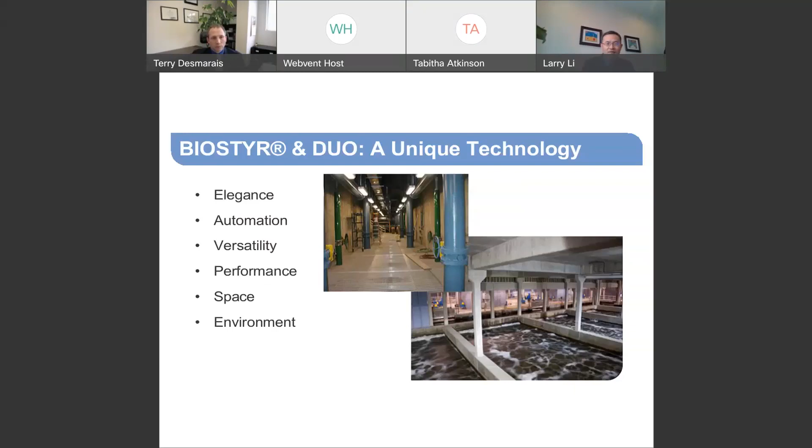And once the water is treated, it goes through the nozzle slab, and it goes up to the second layer, which is what you see here as almost like clean water coming out of a well. It looks like a swimming pool.

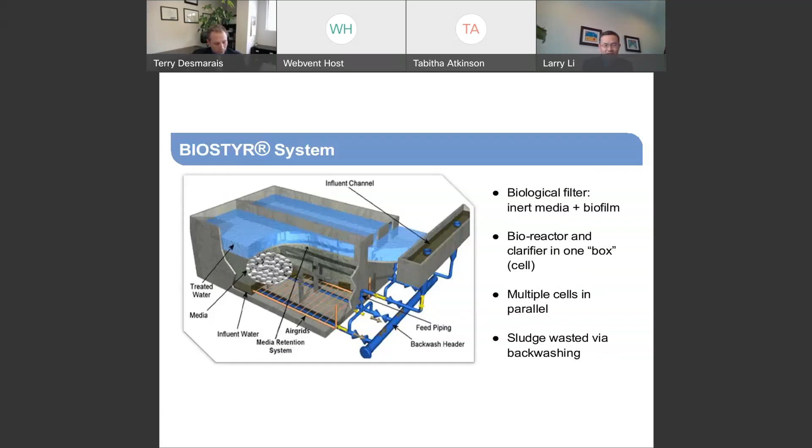Now, a little bit more details. As you can see, this is a treatment cell. On the bottom is the distribution channel, air grids. You have support columns, and you have a supporting slab. The media will be floating against the top ceiling of the treatment cell. So for the regular BIOSTYR, you have the polystyrene media on top. For the BIOSTYR Duo, you will have a layer of the K5 MBBR media. So the MBBR K5 media gives the BIOSTYR technology more treatment capacity.

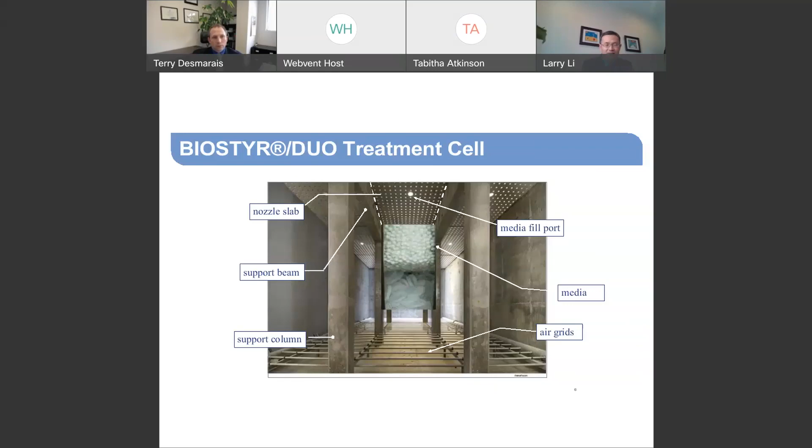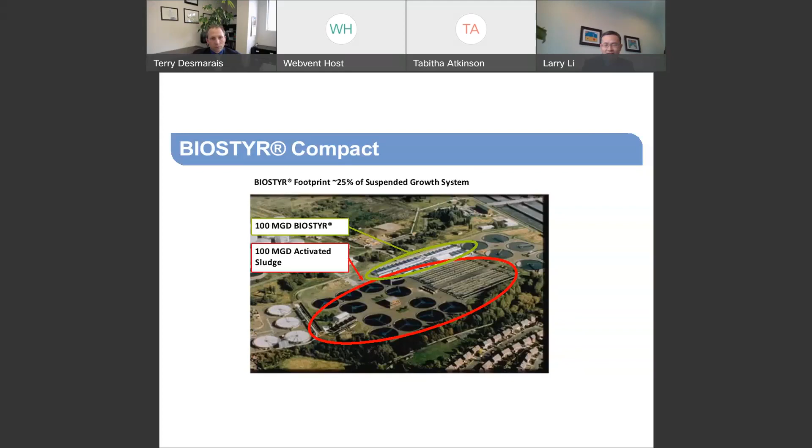This is a quick picture showing an actual plant. As you can see here, there's a 100 MGD BIOSTYR next to a 100 MGD activated sludge process. As you can see, the footprint of the two are very different. The BIOSTYR is only about 25% of the footprint of the activated sludge process. Like we were also talking about, if you are one of the guys who live right there, as you can see those houses, you would appreciate the BIOSTYR probably more than the activated sludge process.

We do have pilot capacity. So if you guys are interested in looking into the technology, we can definitely provide the pilot equipment for any study you're interested in.

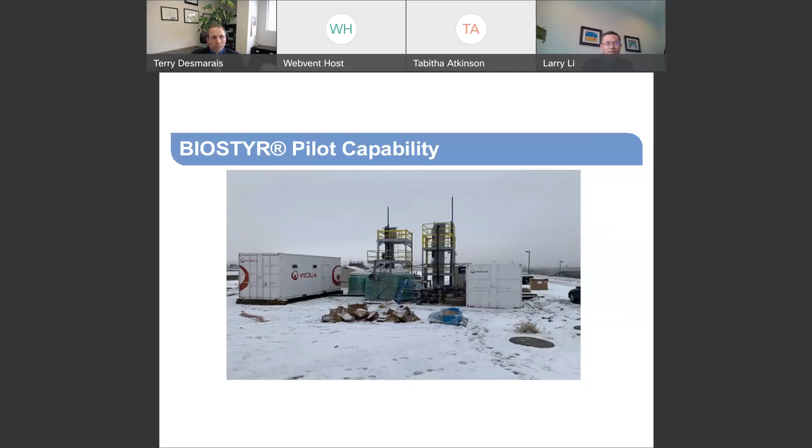I will walk through the City of Portsmouth installation project, where we just recently put in a tertiary level biological aerated filter BIOSTYR, and discuss some of the challenges that it helped us overcome. Just quickly on the City of Portsmouth, it's a seacoast New Hampshire community located on the southeast side of the state, right on the seacoast of the Atlantic Ocean, near the mouth of the Piscataqua River. We're only about 5 minutes from Maine and 20 minutes from Massachusetts. We're tucked right on the seacoast of New Hampshire.

It's a historic community settled in the 1600s, incorporated in the 1800s, and is a tourist destination for the area. We can double our population in a day just based on tourists, and also workforce influx of people. We have within the limits of the city a converted Air Force base. It's now called the Pease International Trade Port. It's a pretty major economic hub for the area as well.

As far as the city's infrastructure, we provide regional water distribution as well as regional treatment of sewage. So we treat all the wastewater from the City of Portsmouth and the International Trade Port. We have a few customers in the adjacent communities, and then there's another island to our east called New Castle, and that is treated by the City of Portsmouth's wastewater treatment system as well.

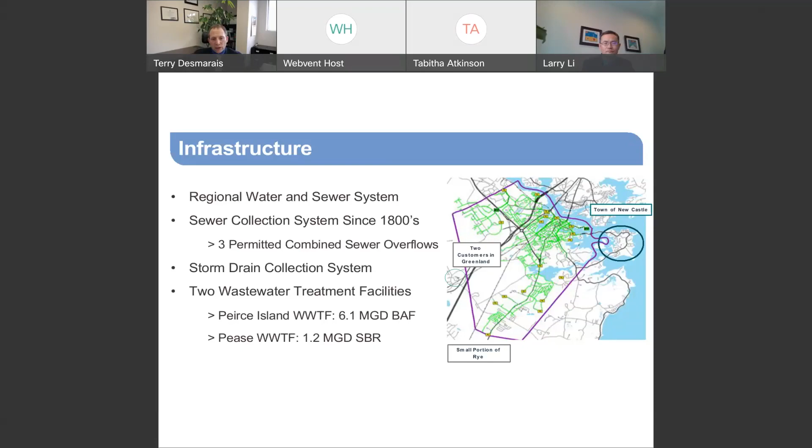The City of Portsmouth sits within an estuary, the Great Bay Estuary. It's in the National Estuary Program, and like many of the estuaries in the country, the dialogue about eutrophication concerns and potential for nitrogen permitting has been going on for well over a decade here. The thing that's interesting, as it relates to the importance of this project, was that we were in the planning phase and the design phase without a permit in place for nitrogen. So it wasn't until later on that the permit came into play as a final permit.

So there were a lot of decisions that had to be made up front on the level of treatment, and you'll see what we elected later on in the presentation. But this is a major estuary. It has 52 communities in both New Hampshire and Maine, and within that area, there are 17 wastewater treatment facilities.

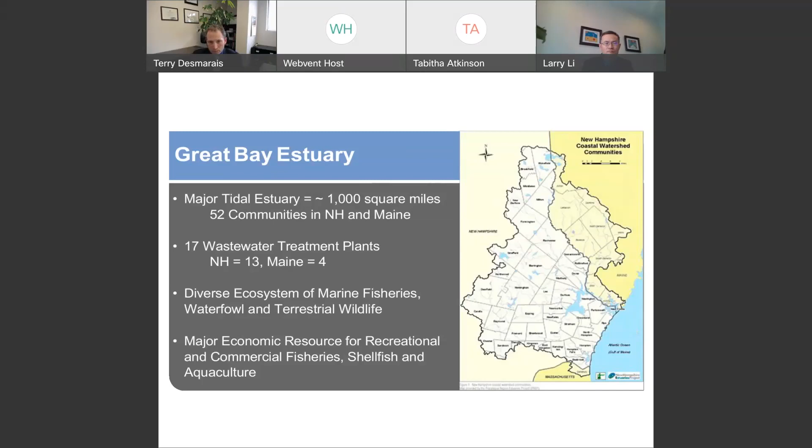So as it relates to the particular treatment facility, the Peirce Island wastewater treatment plant, the treatment facility was constructed in the 1960s, and it operated since 1985 under a National Pollutant Discharge Elimination System permit with a waiver from secondary treatment, referred to as a 301H waiver. It's one of the last few in the country. We operated under that permit until 2007, when we received a secondary level treatment permit, which we could not meet with our physical infrastructure. We ended up in a consent decree with the EPA.

After some wastewater planning in 2012, we had a proposed plan to move forward with an upgrade at the Peirce Island treatment plant. They began construction with that upgrade in 2016 and were completed in 2021. And then, as I mentioned earlier in the last slide, it was not until 2021 that we actually received our permit for nitrogen. Actually, the entire estuary received a permit called the Great Bay Total Nitrogen General Permit. We'll show you how we comply with that in a future slide.

The location turns out to be a very important part of the consideration for our selection of the technology. This here shows Peirce Island. So this is just to the east of downtown Portsmouth. For those who have visited Portsmouth, there's an area called Prescott Park. There's also a historic outside museum called Strawbery Banke. It's a spot that many people would go to. It's located just off to the left. So you have to drive down through historic downtown Portsmouth to get out to Peirce Island.

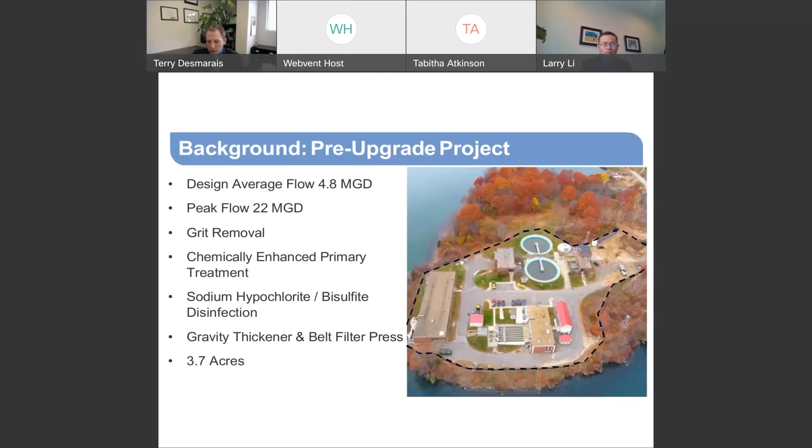As we're looking at an upgrade, however, we knew that we're going to have to be looking at high rate, small footprint technologies. And that's why we began a process in 2011 to do a pretty intensive technology selection pilot program. And our major goals here were to make sure, one, we could find a technology that could fit within the space constraints that were identified. We also wanted to confirm that, because these were not your conventional technologies, we could have reliable nitrogen removal. We knew that was coming down the line. We just didn't know exactly when.

From a permit perspective, being concerned about that unknown, we wanted to make sure that we could maintain and meet the future treatment capacities, both from a nitrogen perspective as well as from a capacity flow perspective, design flow. And we also wanted to confirm that the loading criteria we were being told these different technologies could achieve for treatment could be achieved.

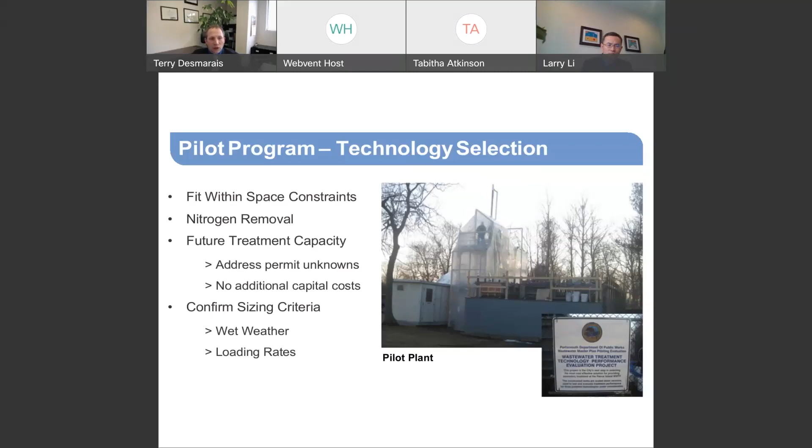We started off, as I mentioned, in the 2011 timeframe. We began with a list of different technologies and configurations that generally included the biological aerated filter, conventional activated sludge with numerous different configurations, one with ballasted floc using BioMag. We looked at different MBBR configurations and also membrane bioreactors. What we elected after doing some initial desktop analyses was to construct on site some small scale pilots.

And what you see here in the picture to the right is, at that time, the Kruger BIOSTYR pilot. The first stage and second stage columns are in the foreground of this picture. Behind that's a series of tanks. Those tanks included a primary clarifier, which we used to mimic our primary effluent. And then we had two other technologies. We did an MBBR followed by DAF for the settling component. And we also did conventional activated sludge with the ballasted floc BioMag and conventional settling.

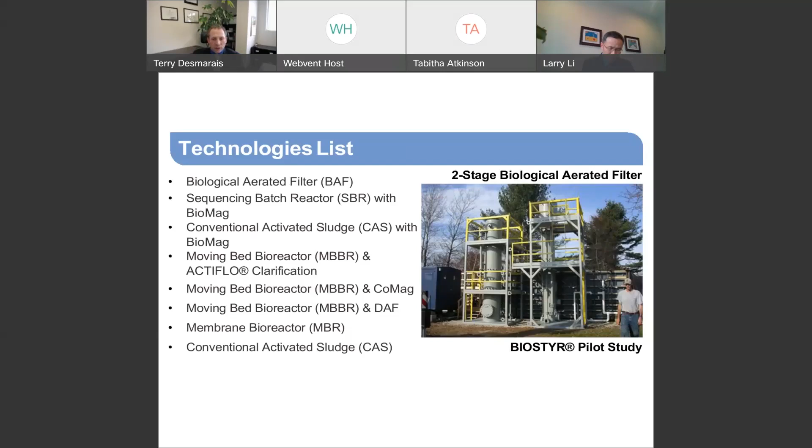So at the conclusion of the piloting effort and data collection, we went through a weighted priority matrix. We identified a number of different evaluation criteria. Not all of these were monetary. In fact, you'll see at the bottom where the costs come into play. But we used our weighted scores of the evaluation criteria and both the capital and life cycle costs to come up with a value ratio. And the best ranked value ratio is the selected technology in terms of moving ahead.

You can see on the evaluation criteria, this was not just performance related. There were a number of these that looked at things like operational track record, health and safety factors. We were interested in how these different technologies dealt with sustained wet weather events and cold water. So that was an item that we prioritized in this evaluation.

And then lastly, one of the biggest was our ability to get from a nitrogen limit of somewhere around 8 down to a nitrogen level as low as the limit of technology, and somehow do that conversion with, of course, a minimal cost, so hopefully with no capital upgrades in the future. You can see that the BAF was weighted the highest, determined to be the best value ratio for the city. We presented this plan to the city council, and they elected to move forward with this plan in 2012.

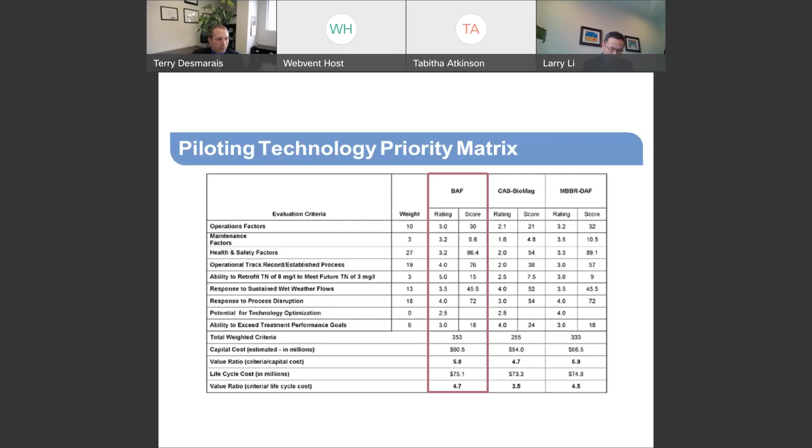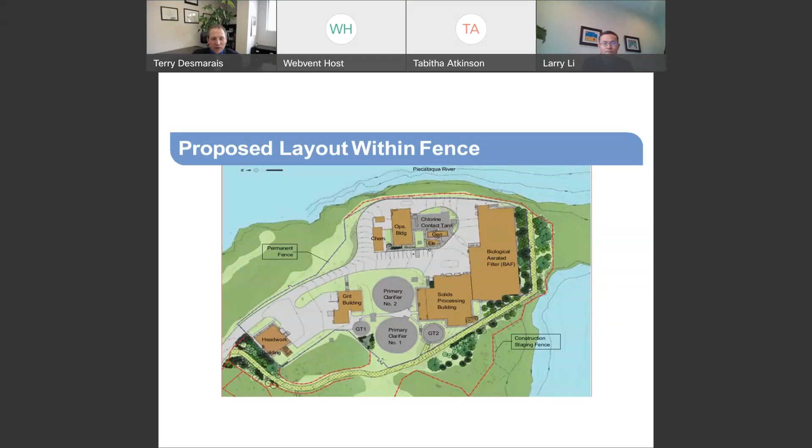In terms of the upgraded design, we have added at the facility a number of unit processes. It was a very complicated construction sequencing project. In addition to maintaining the existing facility during the course of the project and meeting permit, we had to relocate the staff. We had to do a temporary electrical system and had a number of temporary measures in place in order to actually construct this facility while the other one operates.

The design flow of the plant increased from 4.8 to 6.1 million gallons per day. We maintained our peak flow for wet weather treatment at 22 million gallons per day. And we added, as I mentioned, a number of unit processes. Up until this point in time, the facility, because it was so basic, had no need really for influent screenings. So we added a screening building. We modified the aerated grit chambers to improve the hydraulics of those systems and the performance.

Our primary clarifiers were not modified, but we actually went ahead and replaced the internals of those clarifiers prior to our larger upgrade. And from a functional standpoint, they did change marginally. We elected to co-settle our influent solids with the BAF backwash solids in the primary clarifiers. So they're doing a lot of work in the upgraded system. We do still have the opportunity to optimize settling with the use of ferric and polymer, and we do that as a matter of process during the course of wet weather events.

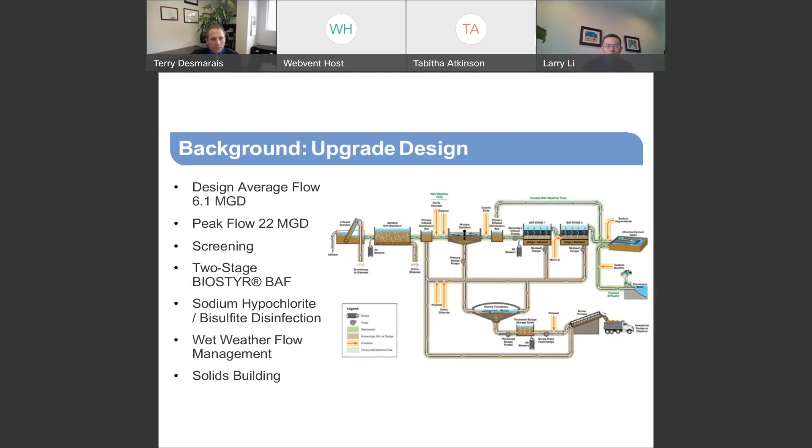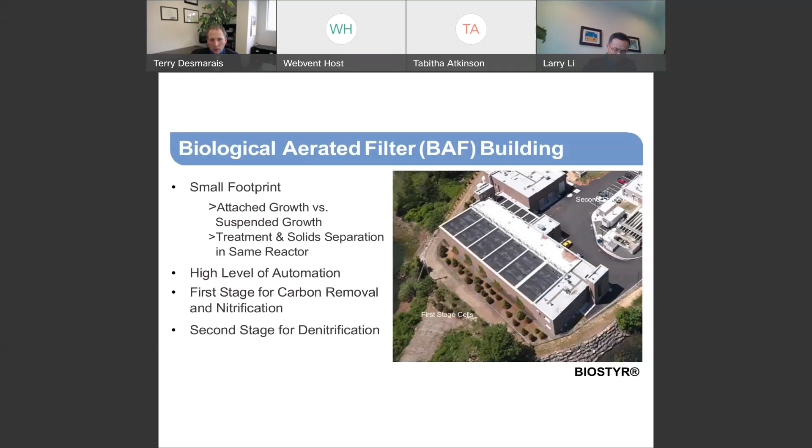So overall, the treatment facility changed dramatically during the course of this construction. It was a 4.5-year construction effort. It was probably over a decade of planning prior to that construction. The project cost for construction was around $75 million. Total project cost is over $92 million. That $92 million included the piloting effort, replacement of the primary clarifiers prior to this project and a number of other planning efforts that were done, like looking at other locations, which weren't selected.

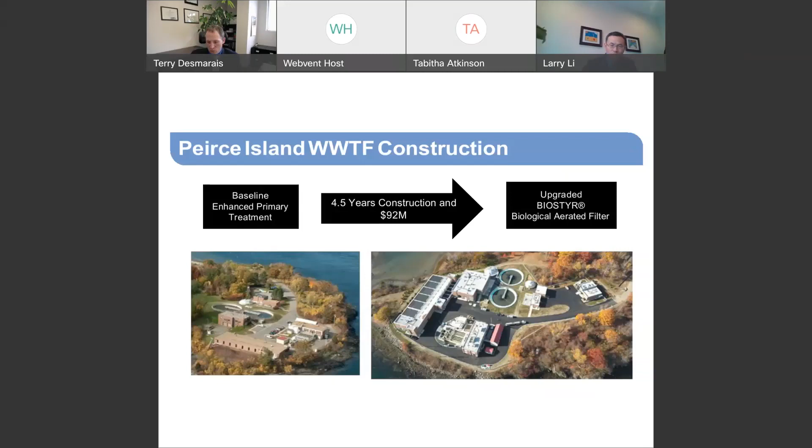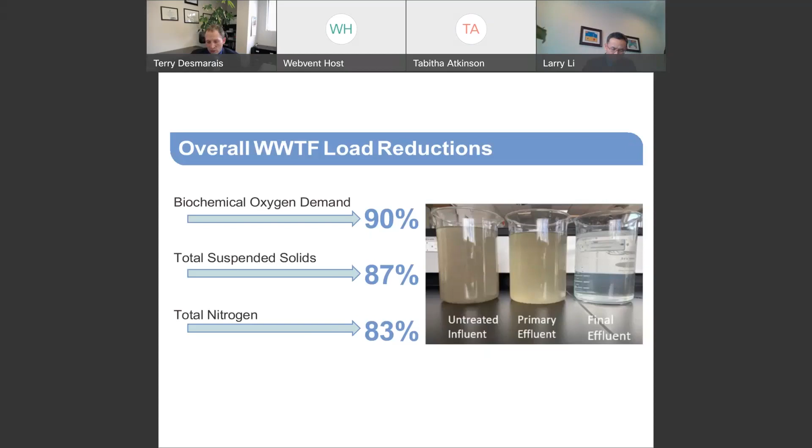So when we compare prior to the treatment plant's upgrade versus after, for biochemical oxygen demand, we've reduced about 90%. So it's almost 2,600 pounds per day less. On the total suspended solids side, we're looking at about an 87% reduction, or about 2,000 pounds per day less. And then for total nitrogen, we have an 83% reduction, and that equates to about 600 pounds of nitrogen discharged less per day than prior to the upgrade.

And you can see that here, just demonstrated in a graphical format. The graphs on the bottom are showing the average load in pounds per day. This is for biochemical oxygen demand. Our facility started up right around the beginning of COVID, so right at the end of 2019, beginning of 2020, we conducted startup. We saw a pretty instantaneous change in BOD and TSS because of the filtering effect of the biological aerated filter, and the microbes grow quicker.

So we're able to see a pretty quick response, and you can see here that soon after, within 2 months after startup, we were performing very well and meeting the permit limit that we had of 30 milligrams per liter average day for the month. So by the time we had to be compliant in April of 2020 for BOD, we were down around single digits for BOD, and we had to be somewhere around 30 milligrams per liter.

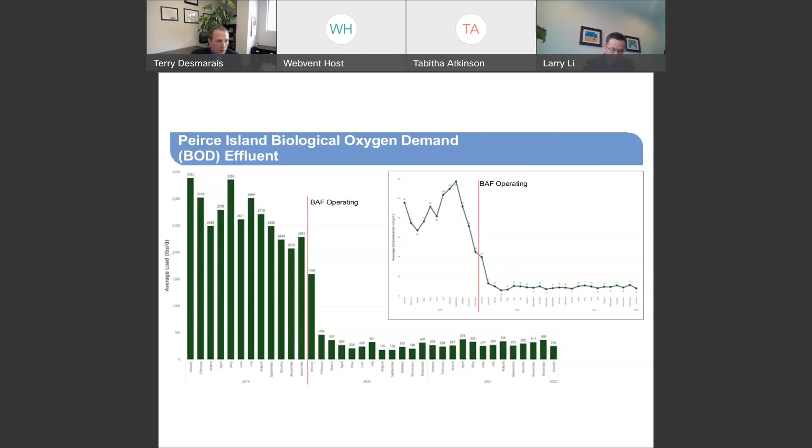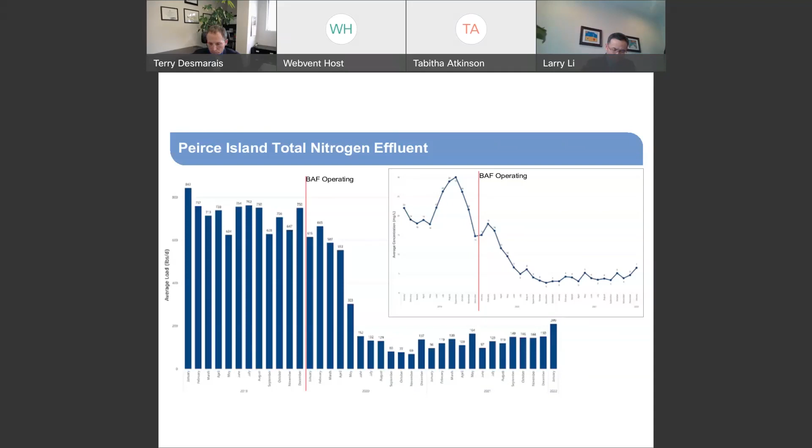I mentioned earlier that we were getting the Great Bay Total Nitrogen General Permit, and that did eventually come to us. The city, we didn't know exactly what this looked like, but we did take a conservative approach in terms of designing the facility. So we saw earlier that we could barely fit the facility kind of within the fence line, but even with that building, we were able to identify a design basis of meeting 3 milligrams per liter at 10 degrees Celsius. So that provides us with a lot of flexibility in terms of meeting what is now this total nitrogen general permit.